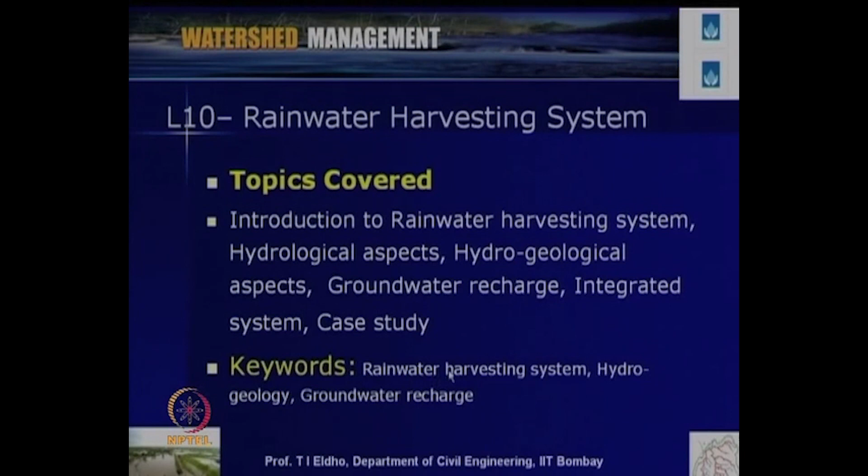Namaste and welcome to the video course on watershed management. In module 3, lecture number 10, we will discuss today rainwater harvesting system. Some of the important topics covered in today's lecture include introduction to rainwater harvesting, hydrological aspects of rainwater harvesting, hydrogeological aspects, groundwater recharge and integrated system for rainwater harvesting, then a case study. Some of the important keywords in today's lecture include rainwater harvesting system, hydrogeology, groundwater recharge.

So, we were discussing watershed management and we have seen that water availability and related water resource issues are major issues as far as the total development plan of a watershed. Water is one of the most important issues as far as watershed development plans are concerned. We get water mainly through rainfall, and this water converts to runoff, many losses take place, and in the hydrological cycle this water will be transformed from one

form to another form. So, the main purpose of rainwater harvesting is to obtain the water wherever it falls, for example, on a watershed basis, if the rainfall takes place in that particular area, we want to capture that rainwater in that particular area and then utilize it. That is the basic concept of rainwater harvesting.

So, we can define rainwater harvesting as a process of collecting, conveying and storing water from rainfall in an area for beneficial use. The use can be domestic purpose, agricultural purpose or any other purpose. Generally the storage can be in tanks or reservoirs or underground storage like groundwater.

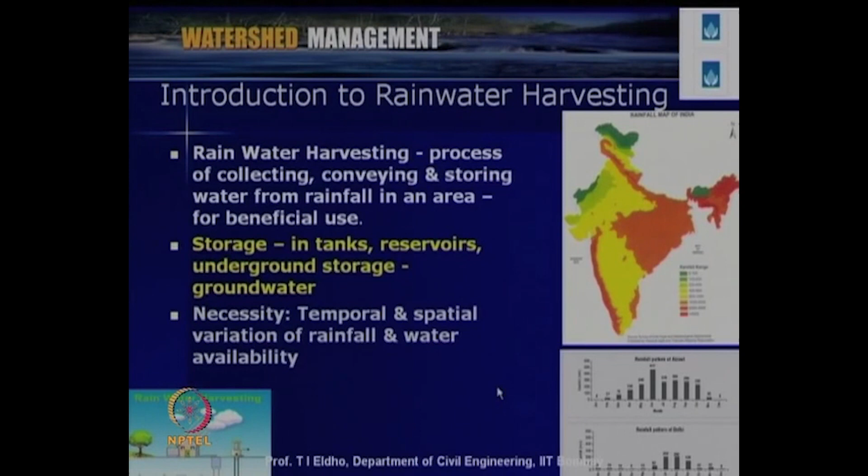For example, consider the rainfall pattern in Aizawl and the rainfall pattern in Delhi. In Aizawl the rainfall is spread over more than 8 months with good distribution, but in Delhi the rainfall is mainly only for 3 months and the average rainfall is about 700 mm per year. So rainwater harvesting is very important. Wherever the rainfall takes place we want to harvest it and use it, especially in that particular location or watershed which we consider.

Rainwater harvesting has been used by our forefathers for centuries, but due to the recent negligence of rainwater harvesting over the last few decades, in many locations we have got a lot of water related problems. So rainwater harvesting is not a new technology, but a forgotten technology which we have to now revive on a large scale.

So, we can define rainwater harvesting as a technology used for collecting and storing rainwater from rooftops, land surface or catchments, or on a watershed basis, using various techniques such as tanks, check dams or recharge to the aquifer system as we discussed.

Since we are collecting the water at that particular location and trying to use it there itself, rainwater harvesting is the most promising alternative for supplying fresh water in the face of increasing water scarcity and escalating demand. We can see that this is due to the growing population, industrialization, and expanding agriculture.

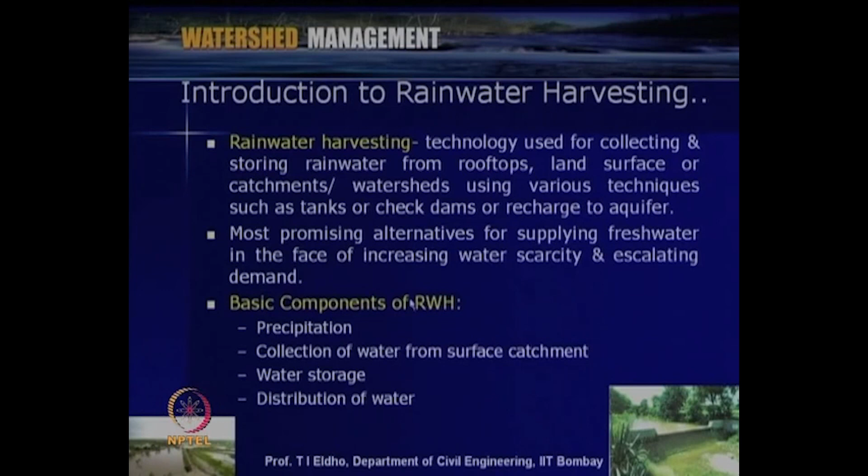The next component is distribution of water. Once it is collected, we have to distribute it, which can be through a small channel system, canal system, piping systems, or also through pumping systems from the groundwater. So these are the important components of rainwater harvesting.

Now let us discuss why we have to do this so-called rainwater harvesting. We have already discussed the important aspects of rainwater harvesting, so now let's see why it is so important.

Rainwater harvesting can yield copious amounts of water. For an average rainfall of about 1000 millimeters, approximately 4 million liters of rainwater can be collected in a year in an acre of land. An acre is approximately equal to 4047 square meters. So post evaporation, if 1000 mm is the average rainfall, we can get approximately 4 million liters of rainwater. That is the advantage.

So much water can be collected depending upon the system used. This rainwater harvesting is neither energy intensive nor labor intensive, making it a cost effective alternative to other water-accruing methods such as desalination of seawater and water transfer from one basin to another. There is no need for any energy or electric power to do this rainwater harvesting, and once a system is made, it is not labor intensive—only some annual maintenance is sufficient. That way, rainwater harvesting is very attractive.

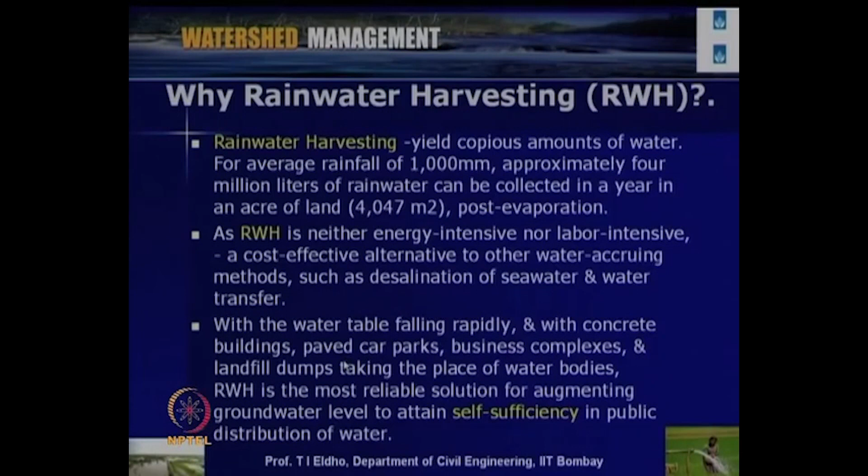Groundwater has an important role in the water plans of any country. If you overdraft this water, the groundwater table will drastically go down. So we have to recharge it whenever rainfall is there and whenever sufficient surplus surface water is available, especially since non-pervious areas due to built-up areas are increasing in cities and other places. We can collect this water and recharge the aquifer system, then utilize it back as groundwater, so that we can attain self-sufficiency in public distribution of water. That is the advantage.

These are the reasons why we have to go for rainwater harvesting.

So now let us see what are the purposes of rainwater harvesting. The rainwater harvesting can serve the following purposes, mainly two major purposes.

One is mainly for agricultural use. We can directly harvest the water just like in a check dam, and then use it for agricultural purposes. And in cities, we can use the rooftop rainwater harvesting system, where water can be directly collected in tanks.

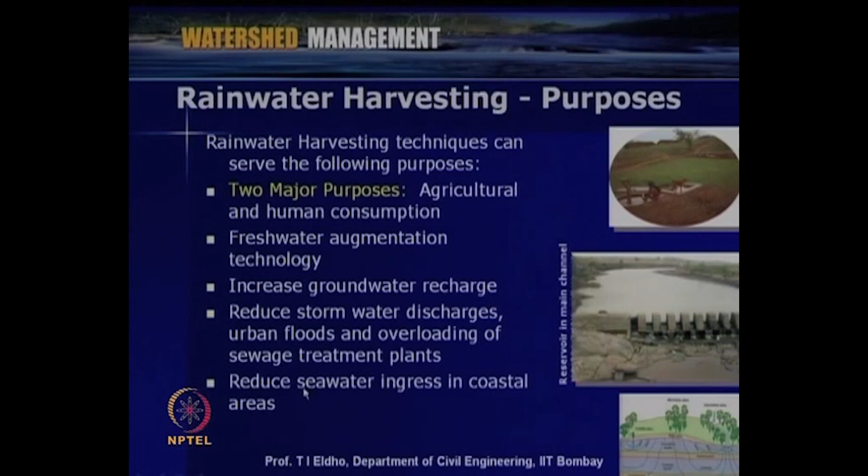Another advantage is that we can reduce seawater ingress in coastal areas. In coastal areas, due to the overdraft of the aquifer systems by huge pumping, most of the time the seawater intrudes into the coastal aquifer system.

If we go for recharging using rainwater harvesting in these areas, more water will be coming to the aquifer system, so that the seawater trying to ingress will be pushed back, and we will have more fresh water from the coastal aquifer system. So that way we can use rainwater harvesting as a methodology to reduce seawater ingress in coastal areas.

So now we have seen the necessity of rainwater harvesting and the purposes also. Now, various methodologies we can adopt as far as rainwater harvesting is concerned. Some of the important methodologies are listed in these slides.

The water harvesting can be undertaken through various ways. Some of the important methodologies listed here include capturing runoff from rooftops. We can directly capture the rooftop rainwater, and that can be stored in tanks in an appropriate way for future use, or we can use that water for recharging purposes. This is generally called roof water harvesting, where we capture the runoff from the rooftops.

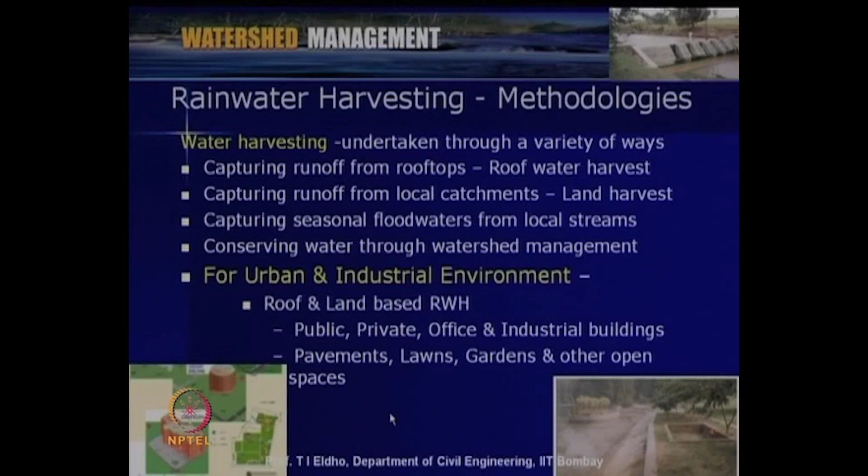So that way, the land available even in industrial or urban areas we can directly utilize. So these are some of the important methodologies of rainwater harvesting. Now within this perspective, let us look at what are the important advantages of rainwater harvesting.

There are a number of advantages of rainwater harvesting. As far as disadvantages or limitations are concerned, there are no such limitations, since it is always beneficial. So some of the important advantages are listed here in the slides.

Rainwater harvesting provides self-sufficiency to water supply, as we already discussed, and reduces the cost of pumping of groundwater. When we are recharging, the water level rises, so that way we can reduce the cost of pumping. It also provides high quality water, soft and low in minerals. Especially for industries where hard water is an issue, rainwater is soft and low in minerals, so we can directly utilize it since the quality of rainwater is very high.

It improves the quality of groundwater through dilution when recharged. Especially in some areas where groundwater pollution is present, if we can recharge a good amount of rainwater, dilution will take place and the groundwater quality will be getting better.

Rainwater harvesting helps to reduce soil erosion in urban areas, as the various structures constructed for rainwater harvesting will reduce soil erosion. Rooftop rainwater harvesting is also less expensive. If you do a cost analysis, you can see that this is one of the less expensive ways of water conservation and utilization.

Rainwater harvesting systems are simple and can be adopted by individuals. There is no complicated technology; it is very simple and easy to adopt. Rooftop rainwater harvesting systems are easy to construct, operate and maintain, with simple design and operational maintenance.

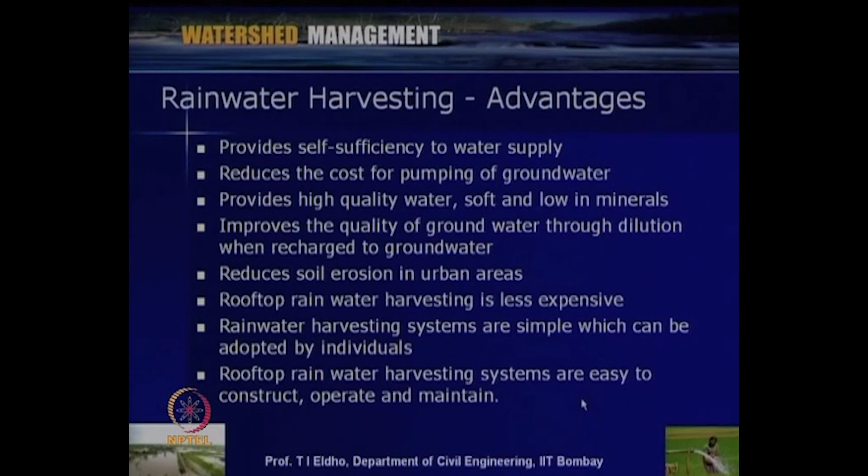Some other important advantages: in hilly terrains, rainwater harvesting is preferred, especially where the slope is very high and most of the water drains out, so we can store or use rainwater for recharging. In saline or coastal areas, rainwater provides good quality water, and when recharged to groundwater, it reduces salinity and helps maintain the balance at the fresh-saline water interface, reducing saline ingress into coastal aquifer systems.

In islands, due to the limited extent of freshwater aquifers, rainwater harvesting is the most preferred source of water for domestic use. Especially in islands surrounded on all four sides by sea, even the aquifers on the coastal sides may be affected by saline water, so there we can directly harvest and utilize rainwater.

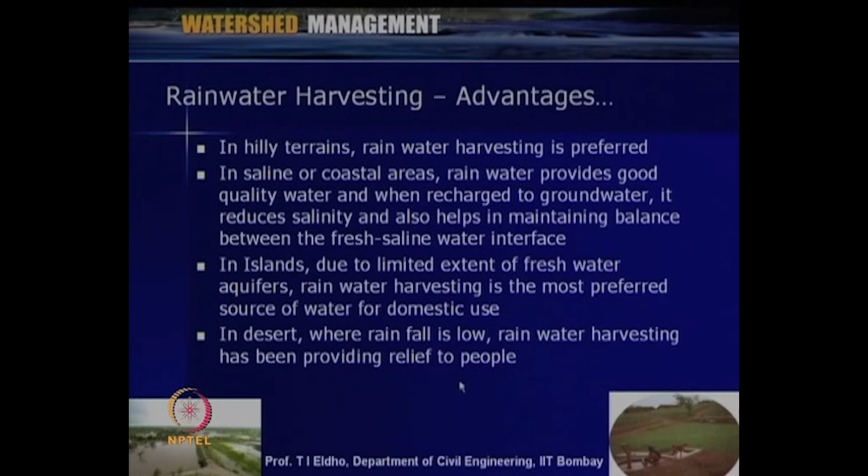In desert regions where rainfall is much less, rainwater harvesting is the only source of water. In many such areas, rainwater harvesting has been implemented and found to be a huge success in arid and semi-arid regions. So we can see that only advantages exist as far as rainwater harvesting is concerned. Even though at the beginning we may have to invest some more money, within one or two years whatever was invested will be recovered, as this is one of the less expensive ways of water conservation and use.

Now, as far as rainwater harvesting is concerned, different techniques and technologies are available. Some of the important techniques are listed in this slide. This depends upon the area and the topography, so accordingly the technology can be classified mainly into three types of areas. The first type is for rainwater harvesting structures, depending upon the topography, meaning the slope of the land, the availability of land, the rainfall, and what kind of structures can be implemented based on economic status.

And then as far as built-up areas are concerned, we can go for tanks like traditional temple tanks, then rooftop harvesting, then wells and radial wells, parking lot storage, recreational park ponds. So, various schemes we can develop for built-up areas.

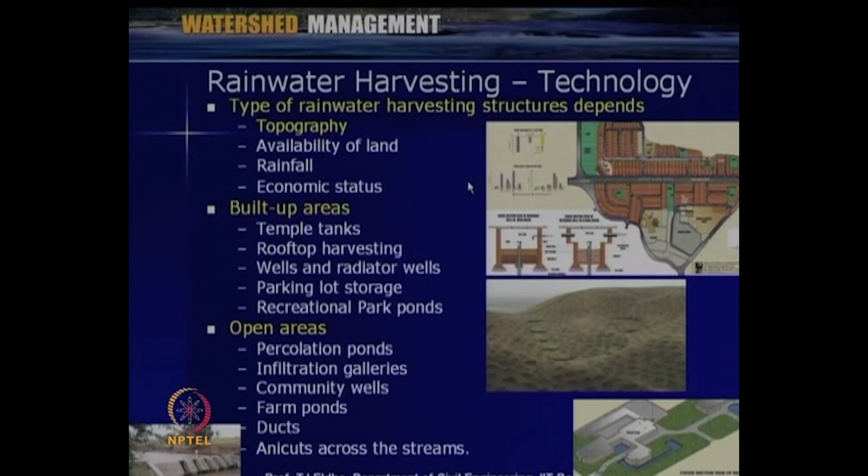So, depending upon the area, the requirements, and the money which we can invest, we can choose a particular technique for that particular location. And it depends upon the use of the rainwater that is harvested, whether domestic consumption or agriculture purpose or gardening. So, accordingly we need good quality water, or the quality can be slightly less, for example if it is for agricultural or gardening purpose. So, that way we can choose appropriate technology for rainwater harvesting and implement it.

So, now let us go back to how much water we can harvest, for example as far as a particular area or a particular watershed is concerned. So, let us look into rainwater harvesting potential. The water yield from a catchment depends on the amount of rainfall, watershed slope, types of soil and vegetation, and the evapotranspiration ratio. So, accordingly the rainwater potential varies.

So, depending upon the area, how much is the rainfall, what is the intensity, what is the duration of rainfall, then what is the slope of the land, then what kind of soil. Infiltration rate depends upon the soil type, and then vegetation of the area, since evapotranspiration depends upon that. So, depending upon the vegetative cover, we can do vegetation management, improved management of vegetation, mainly applicable to large areas, and water yield from a grass cover is more than that from a forest cover. So, depending upon the area we can do vegetative management.

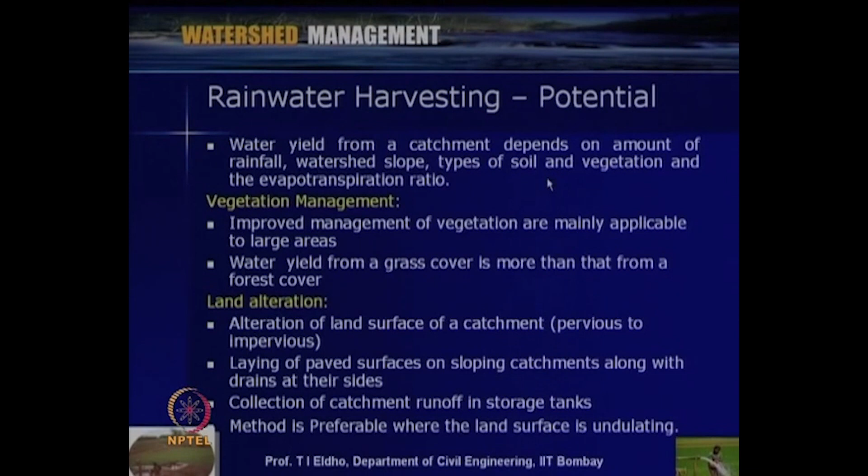Then collection of catchment runoff in storage tanks, depending upon the area. This method is preferable where the land surface is undulating. So, depending upon the catchment, the rainfall condition, and the vegetation, the rainwater harvesting potential varies from one location to another. So, accordingly, we have to do a study and identify the potential of rainwater harvesting for the particular area.

So, now let us look into the hydrological aspects of rainwater harvesting. The important component is the precipitation or snowfall, or the runoff coming from rainfall or snowmelt. So, the hydrological aspects are very important as far as rainwater harvesting is concerned. As we discussed earlier, hydrology is the study of water. Although there is plenty of water on earth, it is not always in the right place at the right time and of the right quality.

So, through hydrological studies we are trying to understand the complex water systems of the earth, and we are trying to solve various water related problems, like how much water can be harvested, how it can be harvested and where it can be harvested. As far as hydrology is concerned, rainfall is the main source of water, which we are trying to utilize in different ways.

So, the hydrological cycle, as we discussed earlier also, is one of the important aspects of what is happening with respect to rainfall to runoff, then the passing of the runoff to the sea, and then evapotranspiration and condensation. In the hydrological cycle, water changes from one phase to another phase in the hydrosphere. So, the balance of water on earth remains fairly constant over time.

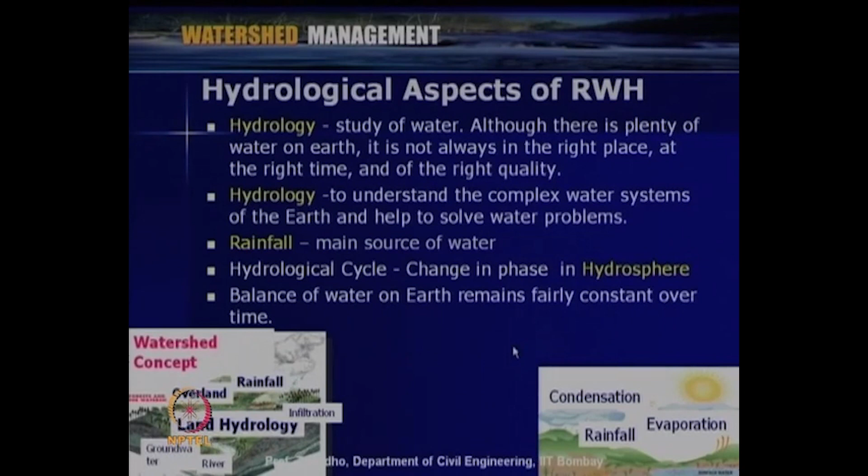So, even though the population is increasing, the water demand is increasing, and agriculture is increasing, the water availability remains almost constant over time. So, we have to use it judiciously, in such a way that we manage our demand with respect to the available water. That way, hydrological studies are very important for rainwater harvesting for a particular area.

So, as I mentioned, in hydrological studies we have to see how much is the runoff potential for a particular area, so rainfall to runoff. We have already seen various processes with respect to rainfall to runoff, such as evaporation, transpiration, infiltration, interception, and percolation. This we have to consider when we go for rainwater harvesting.

So, the various processes and pathways determine how much and how fast the precipitation becomes stream flow or is converted to runoff. Some of the important factors, as we discussed, are the precipitation form, the intensity of precipitation, the duration of the precipitation, and the distribution of the precipitation within an area or within a watershed. It also depends upon how much water storage there is, especially in the soil, like soil moisture, and how much area is saturated. Once the soil is saturated, then only the runoff starts.

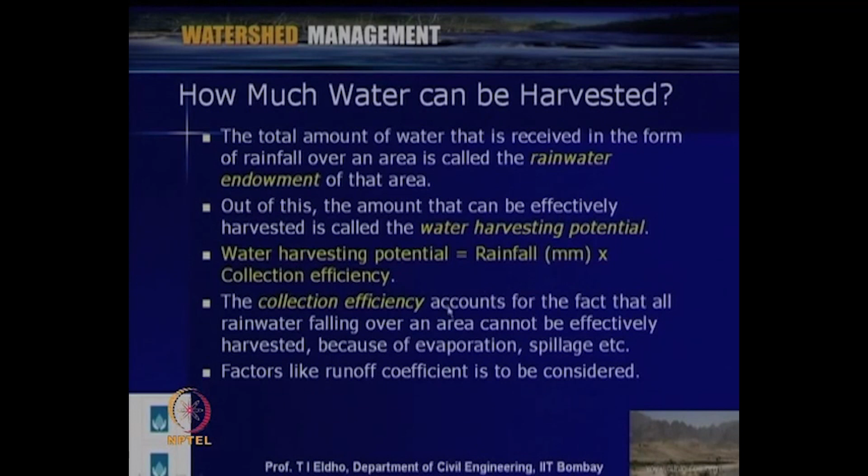So, that is equal to rainfall multiplied by the collection efficiency. The collection efficiency accounts for the fact that all rainwater falling over an area cannot be effectively harvested because of evaporation, spillage, etc. So we have to account for a factor called the runoff coefficient. Generally, in most designs of rainwater harvesting, we take a runoff coefficient and use it to identify the water harvesting potential for that particular area.

This runoff coefficient is a factor that accounts for the fact that not all the rainfall falling on a catchment can be collected or harvested. Some rainfall will be lost from the catchment by evaporation, infiltration, and retention on the surface itself. So we have to identify the runoff coefficient for the given location or area. I have listed the runoff coefficients for a few surfaces here, based upon this reference.

Type of catchment and runoff coefficient: for roof catchments, tiles may vary from 0.8 to 0.9, and corrugated metal sheet from 0.7 to 0.9. For ground surface coverings, concrete can vary from 0.6 to 0.8, and brick pavement from 0.5 to 0.6. For untreated ground catchment, soil on slopes less than 10% will vary from 0 to 0.3, and rocky natural catchment from 0.2 to 0.5.

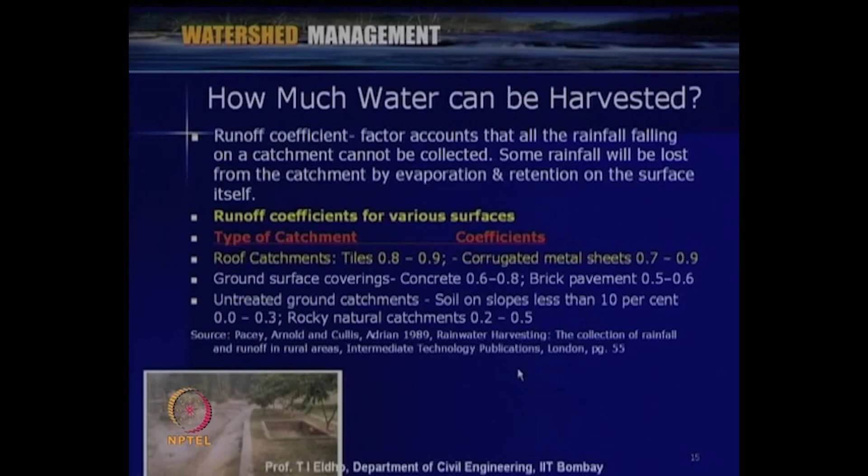So, depending upon the area where you are going for rainwater harvesting, we have to identify the runoff coefficient. The runoff coefficient depends upon the nature of the surface, whether it is concrete, soil, or pavement, and accordingly it will vary. Standard runoff coefficient values are available based upon a number of field or laboratory experiments, so based upon your area we can choose a particular runoff coefficient.

Now the question comes, how much water can be harvested? This figure is taken from the CSE India website. This is the area of the catchment, for example a roof, multiplied by the amount of rainfall, whether it is 100 mm or 1000 mm. That gives the total volume of water received. Then we have to multiply by the runoff coefficient, depending upon the collection efficiency and the area.

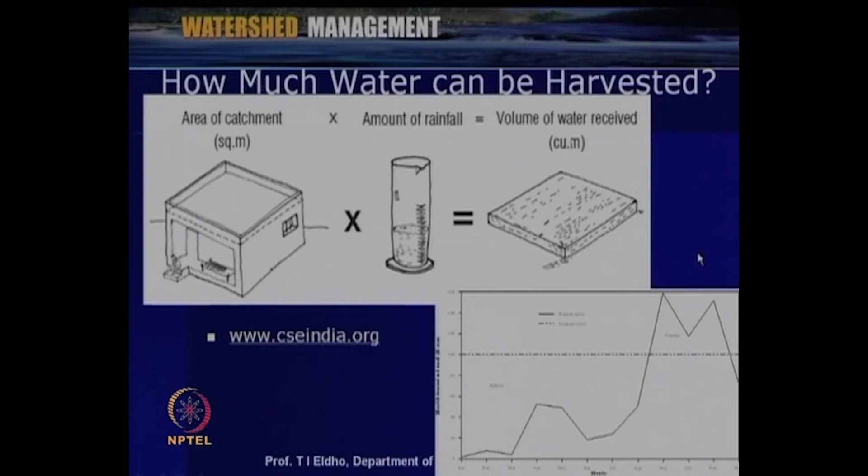Now, in this figure, these are the months and this is the variation. Depending upon the location, the rainfall varies monthly. If this is the average monthly variation for that area, and this is the water demand, you can see this is the lean period, and here we have plenty of water due to rainfall. So depending upon the rainfall pattern and the demand of that location, we can design a rainwater harvesting system for the desired requirement and calculate how much can be harvested.

For example, consider a building with a flat terrace area of 100 square meters and an average annual rainfall of approximately 900 mm. If the terrace floor is assumed to be impermeable and all the rain that falls on it is retained, then in one year there will be rainwater on the terrace to a height of 900 mm. Area of the plot is 100 square meters, height of rainfall is 0.9 meter, so the volume of rainfall, area multiplied by height, is about 90 cubic meters.

Due to various reasons like collection efficiency and losses, if 70% of the total rainfall is effectively harvested, then what we can harvest for this 100 square meter area will be 63,000 liters, considering a collection efficiency of 0.7.

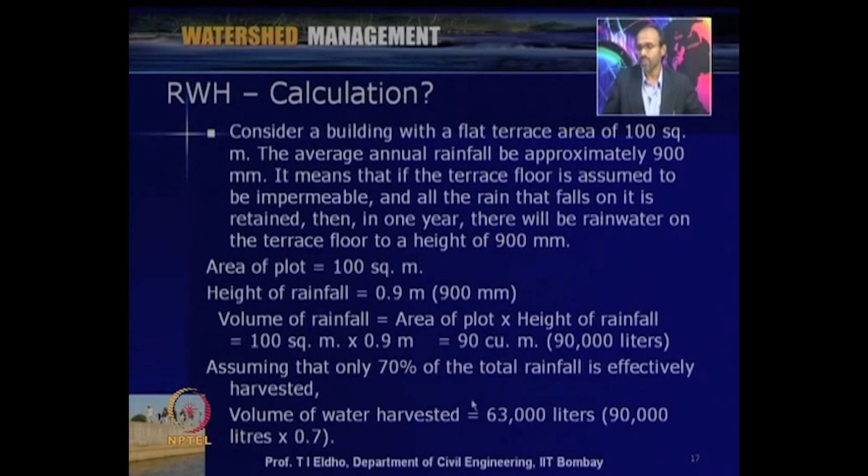So, like that we can calculate how much rainwater harvesting can be done depending upon the type of the location, whether it is rooftop or open space, how much is the rainfall, and then how much is the collection efficiency. This collection efficiency is concerned with how efficiently the rainwater can be collected; as we discussed already, it depends upon several considerations. So, a maximum of say 80% collection efficiency we can consider, depending upon various aspects

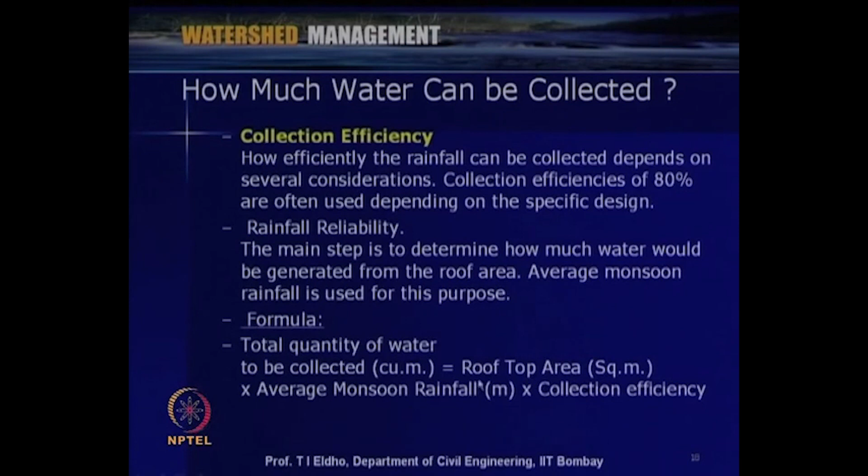for the specific design. And then the other issue is rainfall reliability. The main step is to determine how much water would be generated from the roof area. Average monsoon rainfall is used for this purpose, as we have already seen in the previous slide. So, the monthly variation we can consider, and then we can plan. For this many months we can directly utilize the rainfall, and this much can be collected for the coming months. The simple formula is: total quantity of water to be collected is equal to rooftop area multiplied by the average rainfall into collection efficiency, as we discussed earlier.

So, now let us come back to the scenario in India. As we discussed, in India, because of the distinctive climate due to the monsoon rainfall pattern, the storage of rainwater at appropriate sites becomes very important. In locations like Kerala there are 8 months of rainfall, but in many other locations 2 to 4 months of rainfall. So, depending upon the area and the rainfall pattern, we have to go for the rainwater harvesting system.

For India, the average annual rainfall we can consider as 1170 millimeter, and 80% of this will be received in 3 months: July, August, September. During the rainfall season, all the rainfall takes place in about 200 hours, and half of it happens in 30 to 40 hours. So, this is the main issue. Even to go for rainwater harvesting, we need to specifically design it depending upon the location. Consequently, runoff is very high in most locations, and if it is captured and stored, it can be used effectively later on.

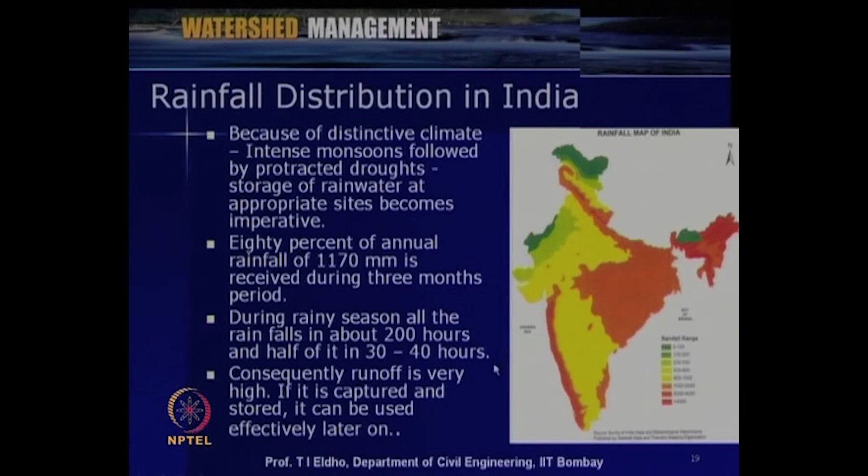So, while going for a rainwater harvesting design, we have to identify the rainfall pattern, whether it is distributed over 4 months or 8 months, what is the intensity, how many days of rainfall and how many hours of intense rainfall. Accordingly, we can design. For example, in Mumbai the average total annual rainfall based upon 25 years of data is about 2335 millimeter. The main rainfall season is June, July, August to September, and the number of rainfall days varies depending upon the month.

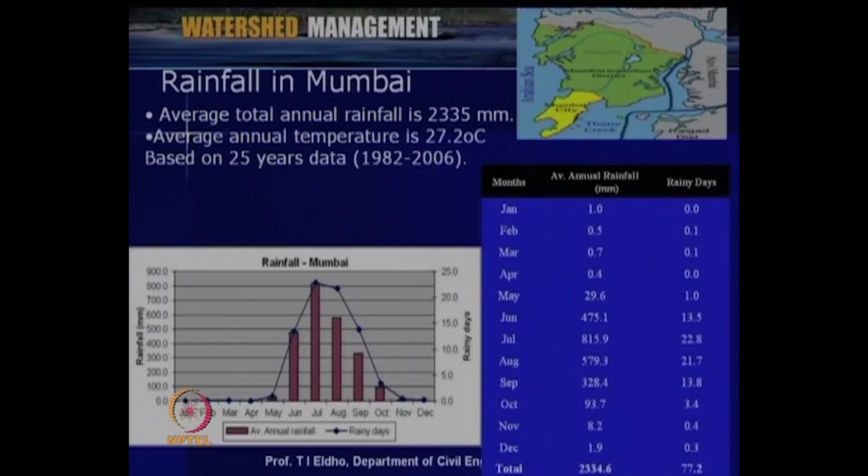So, when we go for a rainwater harvesting design, we have to get such plots: average annual rainfall pattern, monthly pattern, the average annual rainfall and the number of rainy days. These kinds of data will be very helpful to design an appropriate rainwater harvesting system for that particular location. The rainwater harvesting system can be a rooftop based system, a land based system or a watershed based system. We have to see the hydrological aspects: the monthly rainfall variation, the rainfall intensity variation, and the number of days or hours of rainfall. All this data we have to collect appropriately and utilize to identify the rainfall potential and the runoff coefficient, so that we can go for a better rainwater harvesting design.

And now, as we discussed earlier, one of the important aspects of rainwater harvesting is groundwater recharge. Since we cannot store so much water in surface reservoirs or tanks for immediate use, the best solution will be to store the water underground, in the so-called aquifer system. For that, we have to study the details of the geological pattern of that particular area when we go for recharging, especially artificial recharge design.

Of course, natural recharge takes place, but to increase that recharge we can go for artificial recharge. So, the hydrogeology of the area is very important. This depends upon the nature and extent of the aquifer, soil cover, topography, depth to water levels, and of course, chemical quality of the groundwater.

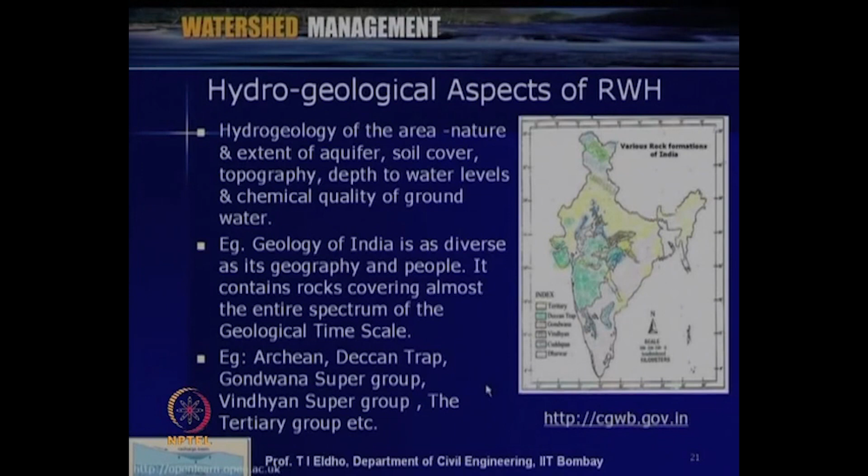And so, as I mentioned, the main source of groundwater is the infiltration taking place during the rainfall, or the recharge to the aquifer system. So, water resource as a result of hydrogeology. Some of the important parameters we have to consider in this infiltration or percolation to the aquifer system are the soil thickness, distribution of rock exposures, pore networks in the rocks, water recharge areas, discharge locations, general flow direction of groundwater, fluid flow characteristics of main aquifer types including the yield, and ground features like lineaments. All these we have to study in detail.

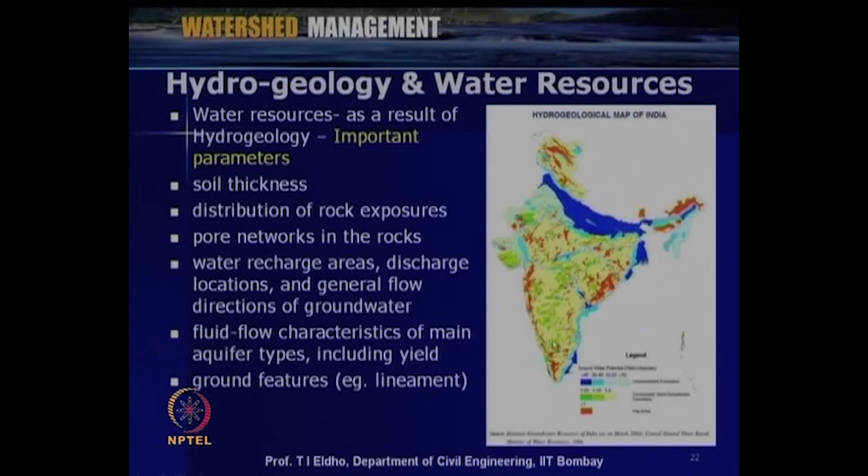So, as we already discussed, groundwater is the major source of water supply in many parts of the world, and groundwater collects in aquifers over thousands of years through infiltration and groundwater flow recharge. A particular amount of groundwater is replenished regularly through rainwater infiltration. Natural infiltration takes place, but through artificial ways we can increase this recharging. Sustainable use of groundwater means withdrawal of groundwater at a rate at which it is replenished through recharge. If we are using a particular amount of groundwater, that amount should be replenished through the year due to the rainfall, so that sustainability will be there.

Otherwise, if you keep on pumping and sufficient recharge is not taking place to the aquifer system, the groundwater level will drastically go down, and you create other problems. So, we have to see a sustainable recharging pattern for the particular area. Faster withdrawal rates would lead to a fall in the water table and finally depletion of the groundwater. So, the groundwater recharge areas need to be identified. In a particular area, depending upon the soil nature, vegetative cover, etc., we have to increase the recharge possibility. We have to identify the area, and then design appropriate structures as far as rainwater harvesting or recharge is concerned.

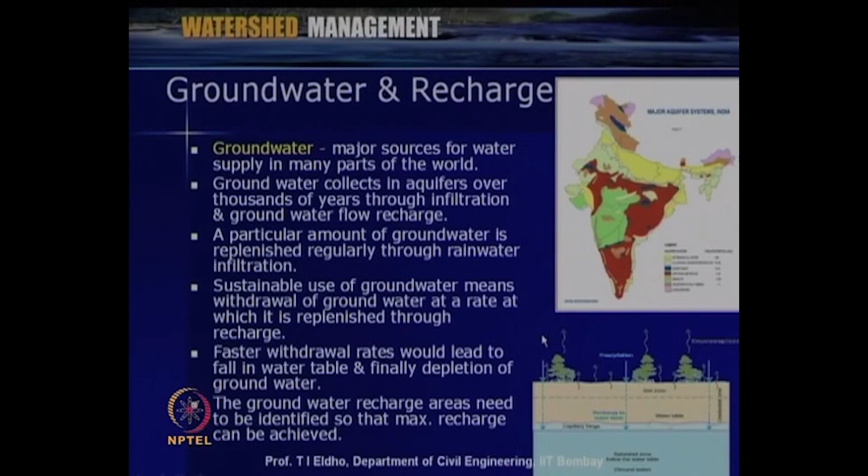So, this figure shows the major aquifer systems of India. Depending upon that we can plan the recharge structures, especially when we go for artificial recharge. As far as groundwater recharge is concerned, groundwater availability depends upon the recharge, as we already discussed. Groundwater is controlled by the hydrogeological situations characterized by the alluvial formation and quartzitic hard rocks. The groundwater quantity depends upon the potential areas and availability of the unsaturated zone for recharge.

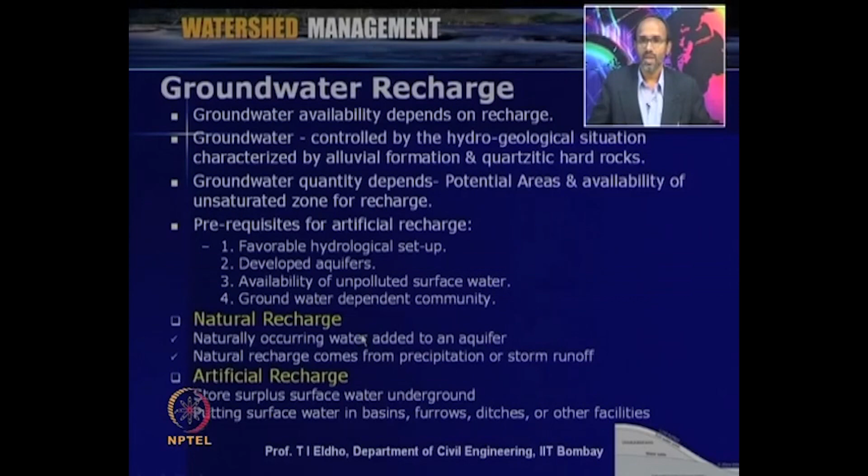So, before we go for artificial recharge, as I mentioned, we have to study the details of the hydrogeological pattern, the developed aquifer system, the availability of unpolluted surface water, and the groundwater dependent community, that is, how much usage is taking place in the particular area. As I mentioned, the recharge can be natural recharge or artificial recharge. Natural recharge means naturally occurring water added to an aquifer depending upon the rainfall pattern. Natural recharge comes from precipitation or storm runoff. Artificial recharge means we are providing particular structures to increase the recharge rate.

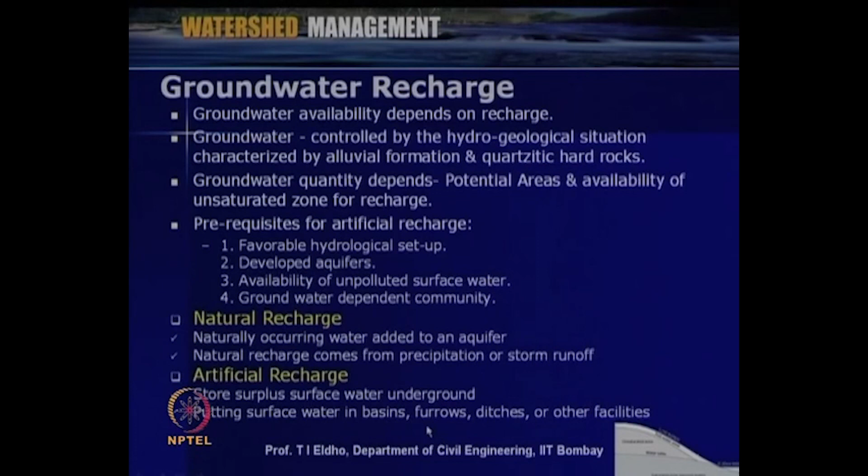So we store surplus surface water underground, and that is allowed to recharge by putting surface water in basins, furrows, ditches or other facilities. Artificial recharge nowadays is getting a lot of importance from many government agencies. Depending upon the area and the needs, various techniques are available, like direct surface techniques such as simple flooding, basins or percolation tanks, stream augmentation, ditch and furrow system, and over irrigation of the area. These are some of the direct surface techniques.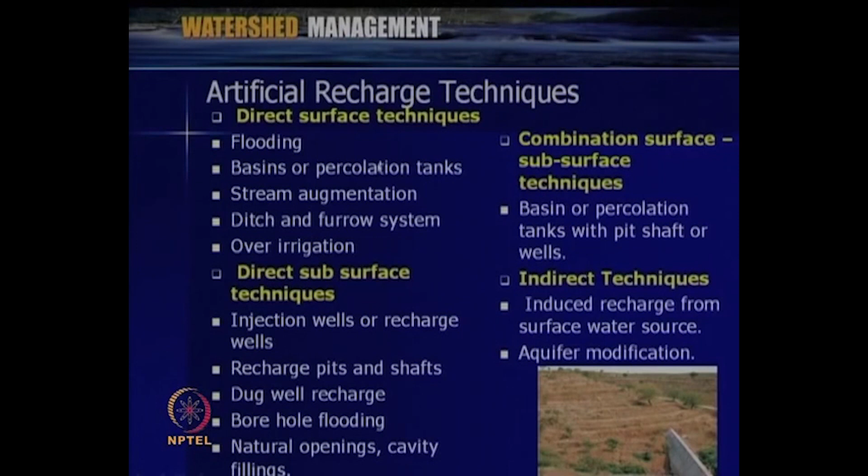Then we can go for direct subsurface techniques like injection wells or recharge wells, recharge pits and shafts, dug well recharge, borehole flooding, natural openings, cavity filling, etc. We can also have combined surface and subsurface techniques like basin or percolation tanks with pit, shaft or wells. Then there are indirect techniques like induced recharge from surface water source, aquifer modification, etc. So these are some of the important artificial recharge techniques we can adopt depending upon the area.

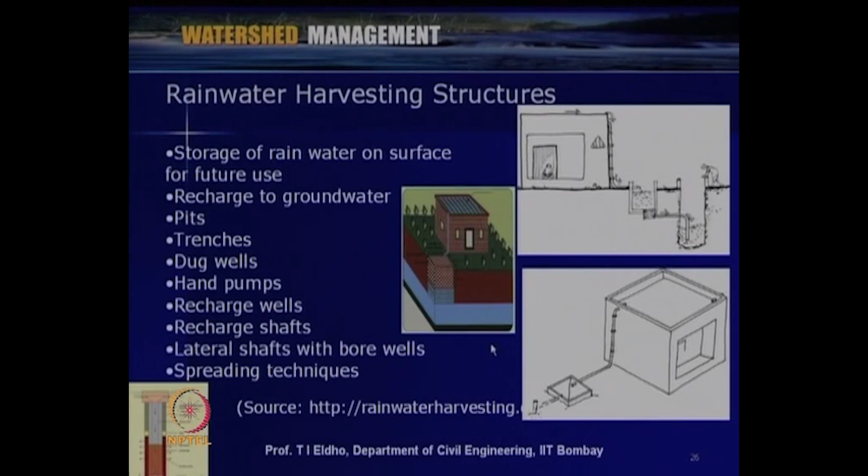As far as rainwater harvesting structures for recharge are concerned, depending upon the area and location, we can have various structures like storage of rainwater on the surface for future use — that is rainwater harvesting through recharge. Recharge to groundwater can be through pits or trenches, dug wells, hand pump wells, recharge shafts, lateral shafts with bore wells, and spreading techniques. This website gives various techniques of rainwater harvesting structures, especially for artificial recharge.

While doing artificial recharge, most of the time we also have to identify how much groundwater recharge is taking place, so simple techniques are available to quantify this. The most commonly used technique is the soil water balance method, where recharge equals precipitation minus evapotranspiration plus the change in soil water storage minus the runoff.

Then we can use the simple groundwater level fluctuation method, where whatever we can harvest is equal to Sy into delta S plus Tp minus Rt, where Sy is the specific yield, delta S is the rise of the water table, Tp is the abstraction during the rainy season, and Rt is the return flow due to any irrigation occurring during the rainy season.

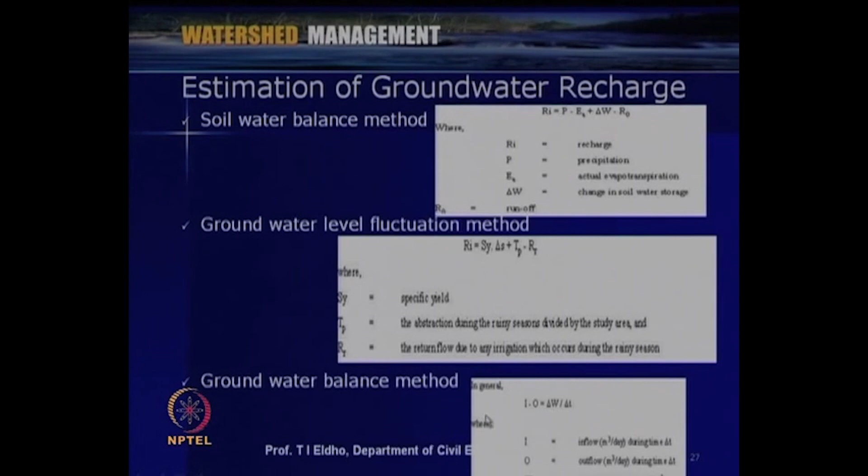Then we can go for the groundwater balancing method, a simple equation: inflow minus outflow equals change in storage. This equation gives the groundwater balancing method. Depending upon the requirement, we can choose a particular simple technique and calculate how much recharge is taking place for that area.

Some important design considerations for rainwater harvesting include what kind of requirement we have, whether direct use storage or recharge to improve groundwater availability. We also need to identify the hydrogeology of the area, the nature and extent of the aquifer, topography, the area contributing to runoff, and hydrometeorological characteristics like rainfall duration and intensity.

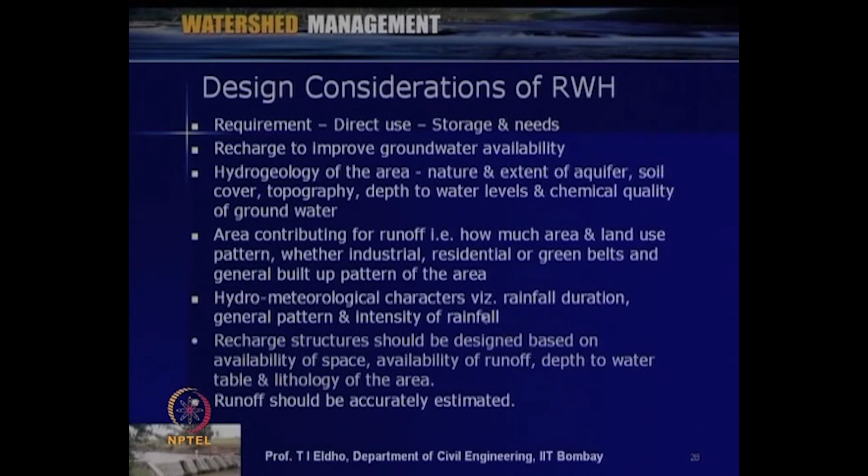The recharge structure should be designed based on the availability of space, availability of runoff, depth to water table, and lithology of the area. So we can calculate the runoff and design the rainwater harvesting technique appropriately.

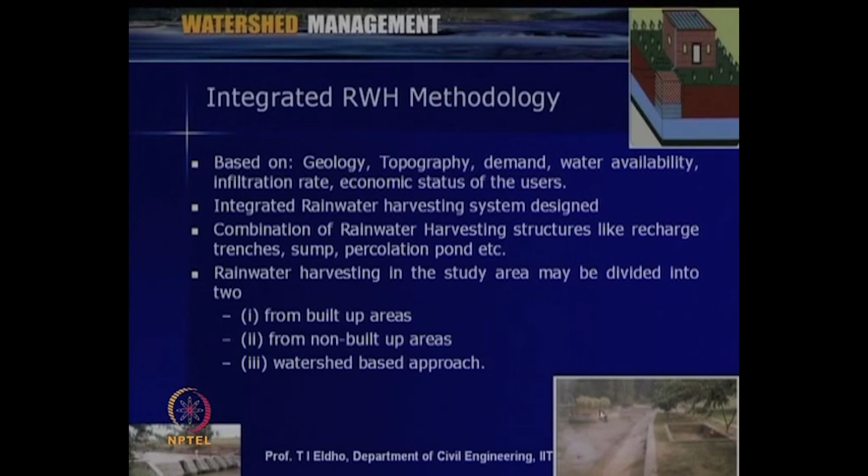For a particular watershed or area, we can go for an integrated rainwater harvesting methodology, based on geology, topography, demands, water availability, infiltration rate, and economic status of the users. This integrated rainwater harvesting system is a combination of structures like recharge trench, sump, and percolation pond, including rooftop rainwater harvesting, land-based rainwater harvesting, and a watershed-based approach. Here I have put a flow chart for integrated rainwater harvesting in an area.

So this is the rainwater harvesting which we want to identify. We can identify how much is built up area and non built up area. For the built up area, we identify how much water we want to store for direct use and how much we want to recharge. Then, from the direct use after storage, we determine how much excess is taking place.

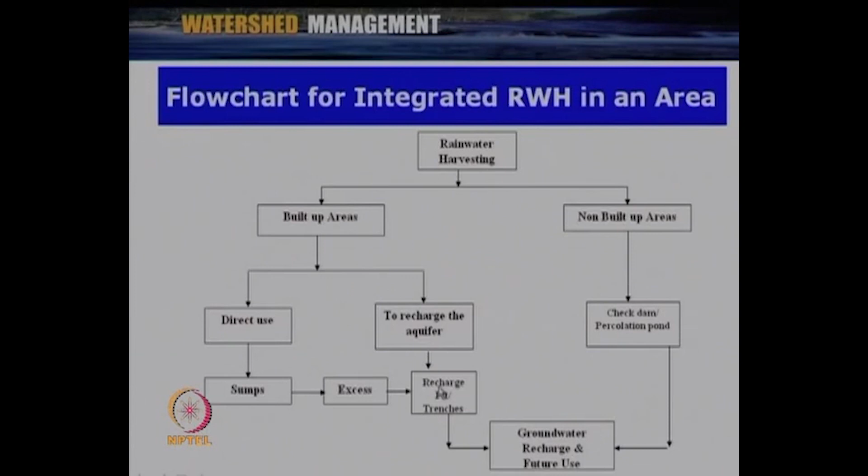So that we can put for recharging, and then finally that will be contributing to the groundwater recharge. So in non built up area we can store some water either in small reservoirs or percolation ponds, and the remaining water can go as groundwater recharge. So we can design an integrated rainwater harvesting scheme for a particular watershed or area depending upon the need and the various local conditions.

So before closing today's lecture, let us briefly go through a case study. The case study is the rainwater harvesting done in the Jhabua watershed.

This Jhabua watershed is in Madhya Pradesh, and the area is about 1800 square kilometers, with altitude varying from 380 to 540 meters. It is a highly undulating, sparsely forested area, with 57% arable land and about 18% notified as forest land.

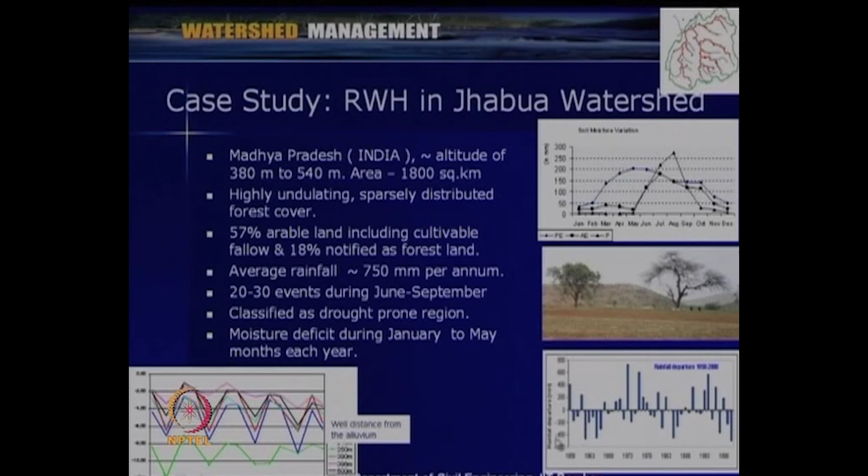Average rainfall is 750 millimeters per annum, occurring in 20 to 30 events during June to September. This is classified as a drought prone region, with moisture deficit from January to May. You can see the rainfall pattern for the area here.

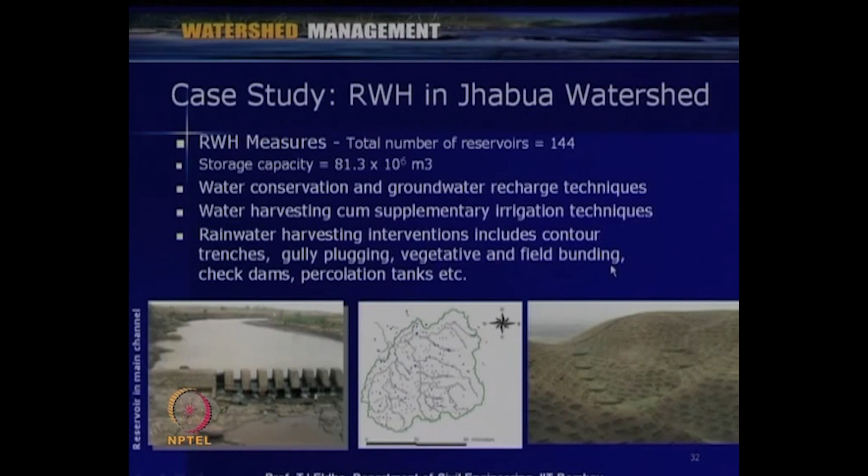With the help of various government agencies and NGOs, various measures were adopted for the area, like construction of a large number of check dams and reservoir storages, about 144 storages storing this much water. Water conservation and groundwater recharge techniques were applied, such as contour bunding and small trenches in various landforms. So the rainwater harvesting interventions included contour trenches, gully plugging, vegetative and field bunding, check dams, percolation tanks, etc.

The project started in 1995 onwards, and when assessed in 2000 to 2003, the impacts were huge, like about 2 to 4 meter rise in groundwater level.

Sufficient water for domestic and agriculture purposes became available in the area. One farming per year before rainwater harvesting has gone to 2 to 3 depending upon the area and crop, and there was no water scarcity even in drought periods. Agricultural yield increased from 30 to 60%, and the percentage of forest land rose from 18 to 23%, with overall economic and social upliftment in the area.

Even migration of people came down to nil, and people's participation in the rainwater harvesting scheme is one of the important aspects of this Jhabua watershed case study.

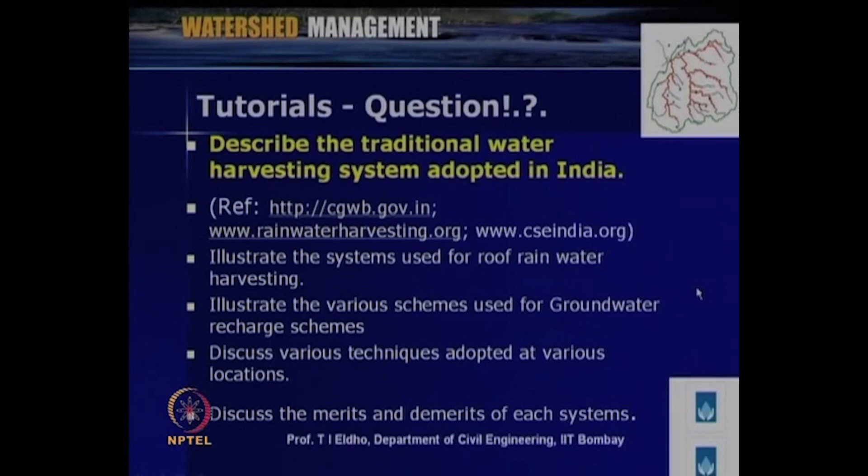You can illustrate the system used for roof rainwater harvesting or groundwater recharge schemes, and discuss the various techniques and the merits and demerits of each system. These details you can see on these websites.

A few self-evaluation questions: discuss the necessity and purpose of rainwater harvesting, what are the advantages of rainwater harvesting, discuss the hydrological aspects of rainwater harvesting, illustrate the importance of hydrogeological aspects of rainwater harvesting, and what are the important design considerations as far as rainwater harvesting is concerned.

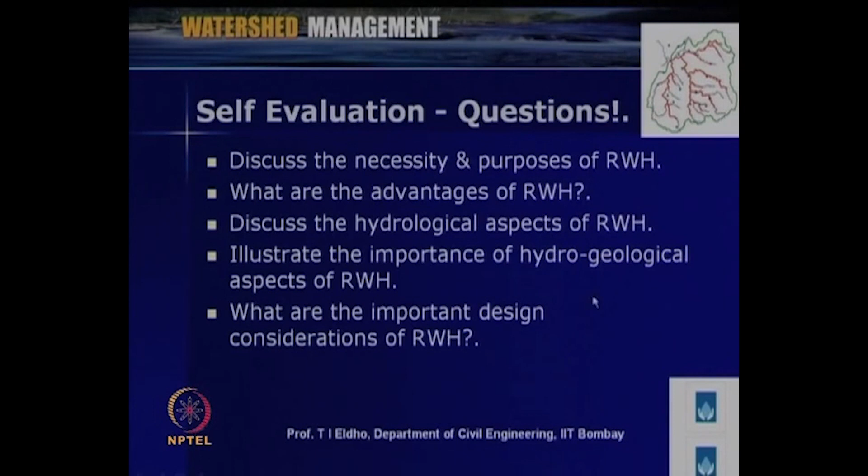All these questions we have already discussed in today's lecture. A few assignment questions: illustrate various rainwater harvesting methodologies for various locations, how to assess rainwater harvesting potential for an area, discuss various techniques of artificial groundwater recharge, and what is integrated rainwater harvesting methodology. All these related answers we have discussed in today's lecture.

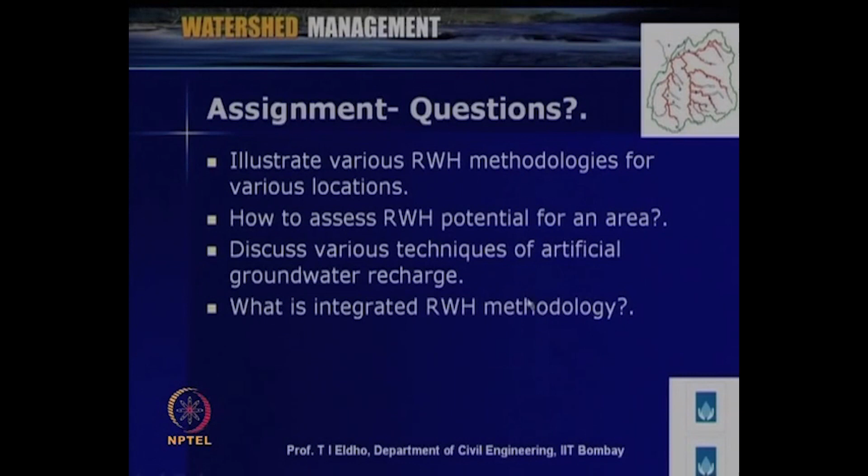For an unsolved problem for the listeners: for your watershed area, prepare an integrated plan of rainwater harvesting scheme considering water storage and recharge. Identify the present supply and demand for your area, identify built up and non built up area, then check the possibility of direct rainwater harvesting tanks and recharging techniques. Collect all the data requirements like rainfall, soil data, agricultural pattern, etc. Then design an integrated rainwater harvesting scheme including direct harvesting, storage, and groundwater recharge, based upon today's lecture, for your own area.

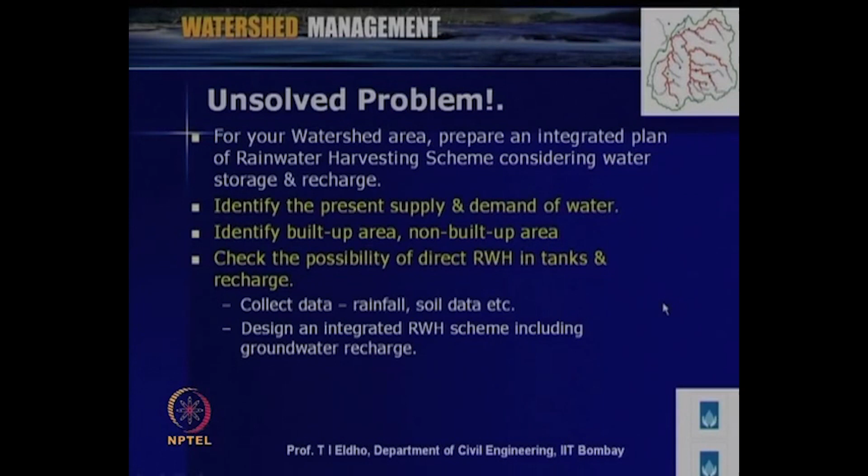So in this lecture today we discussed rainwater harvesting. In the next lecture we will continue with some more aspects of rainwater harvesting, particularly discussing rooftop rainwater harvesting. With this we will close for today. Thank you very much.